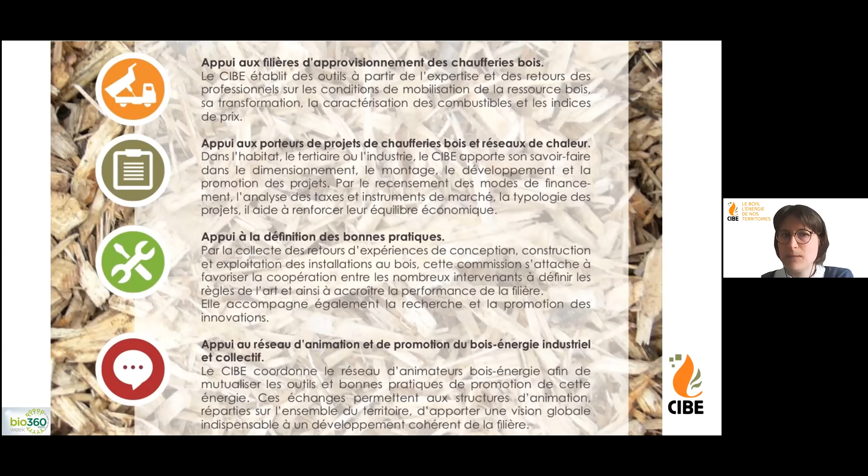So we have 4 working groups that we call commissions. Each of them work on the different aspects within our sector. The first one, for example, focuses on sourcing. The second one pays particular attention to providing support, legally speaking, to project managers and also legal and fiscal support. Then we have a third one that focuses on everything that revolves around technological improvements and maintenance on the different installations. And then we have a last one that is the one that we're going to home in on today. This concerns wood energy management, everything that concerns the local development of wood and energy.

So, 4 main parts to our presentation today. First of all, I'll give you a general overview about what we mean by wood energy management, our objectives, the structures that we're looking to set up, and I'll say a few words about what we call the Wood Energy Management Commission, and also I'll talk about the way in which our wood energy moderators or leaders or managers work. Then we'll move on and we'll focus on support to the structure when it comes to sourcing. Other people will give presentations at this moment.

We'll talk about the wood energy managers and the role they play in the local regions, all the actions that they take within the forestry and wood sector, also everything that we do to promote quality. And here we refer to the ISO 9001 certification and also the Wood Plus quality approach. And last but not least, we'll focus on all of the monitoring, the supervision that we do for the sourcing of wood energy in order to optimize everything that concerns it.

When it comes to wood energy management, what are we actually talking about? Wood energy management, well, it's all made up of organizations that, let's say, since the 1990s have looked to exit from the vicious circle of wood energy at the time. In other words, there were all these heating units, boilers and furnaces that were hesitating about turning towards renewable energy because they were scared that there wouldn't be enough local resources, and those who potentially could supply the resources didn't necessarily want to because they didn't really see whether it had a future or not. So why make any effort? Because maybe there wouldn't be any projects.

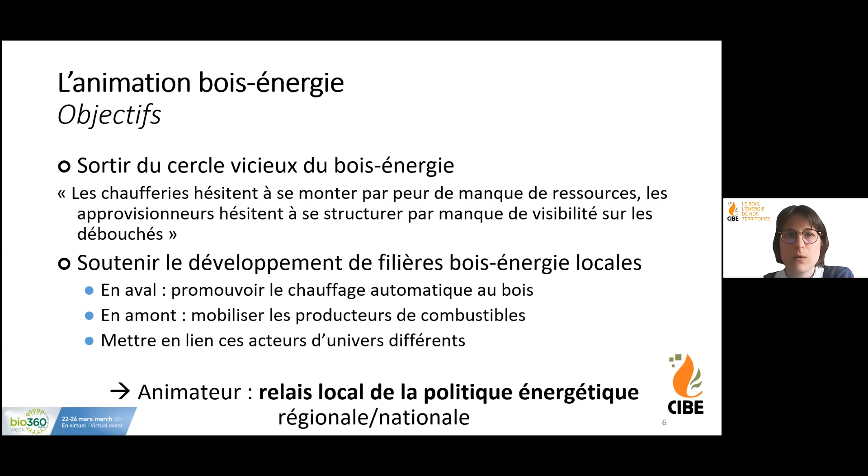So our wood energy management process wanted to promote automatic wood heating solutions to the industrialists, the farmers, and also the stakeholders in the market, and to encourage the wood producers and all of the different stakeholders to come together and talk to each other. So initially speaking, we served as a local relay to focus on national and local wood energy projects to gradually bring everybody together around the table.

So what looks very promising when it comes to wood energy management? Well, globally speaking, we tend to work with associations that bring together different professions between the wood and forestry sector. We work with associations in the renewable energy sector. It could be Energies 15 that we referred to earlier, and Bois Energie 66. We also work with lots of forestry communities, in other words, communities where they own forestry land, and also associations in a farming setup. CIVAM is a French organization that brings together several associations.

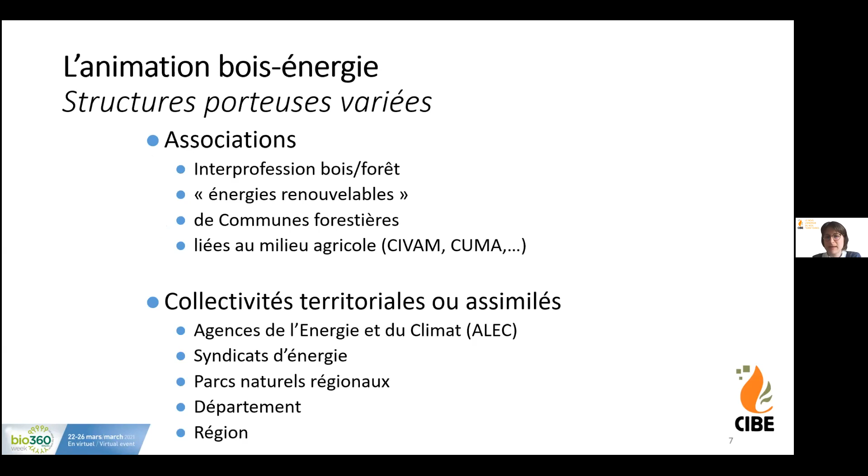These are all structures that are funded by regional delegations of the ADEME, the French Agency for Environment and Energy Management. And so it basically means that they play a very neutral role, and it doesn't cost them money in their local area because they're able to provide advice without there being any monetary interest for the builders or for the design and development office. I repeat, they are totally neutral. Wood energy can be a solution, but not necessarily always the best solution. So the idea is to always put together consistent projects in the local areas.

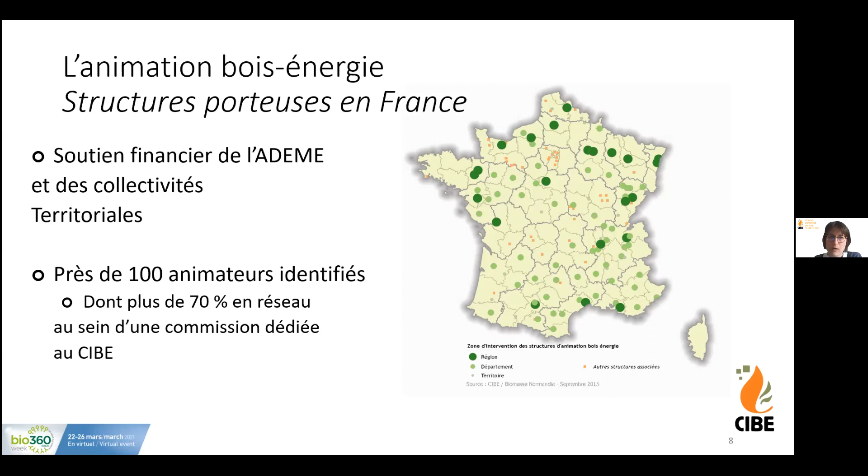In terms of our targets, we've identified 100 managers. We have nearly 100 wood energy managers, and over 70% of them are members of our association. So there is a certain amount of membership within our professional structure.

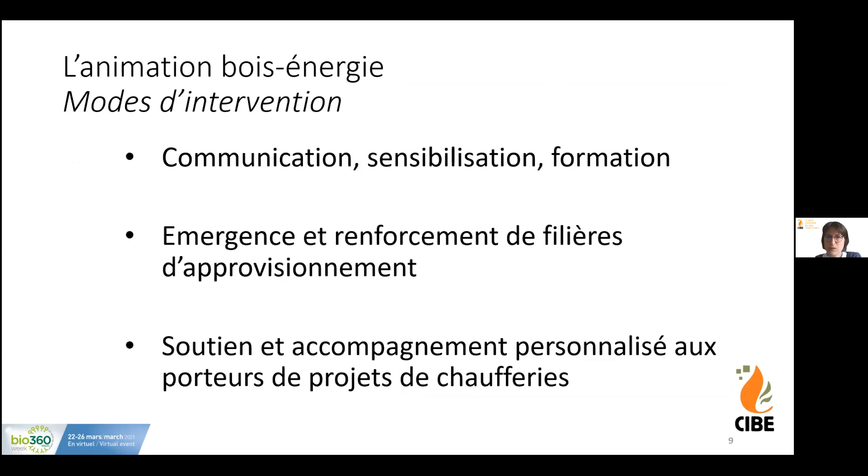When it comes to the methodology that they adopt, they have three different types of approaches. One, they communicate, enhance awareness, and provide training. Two, they attempt to reinforce the sourcing solutions and bring about new sourcing solutions. And they also provide personalized, tailored support for those who've got projects for setting up new heating systems in their local environment.

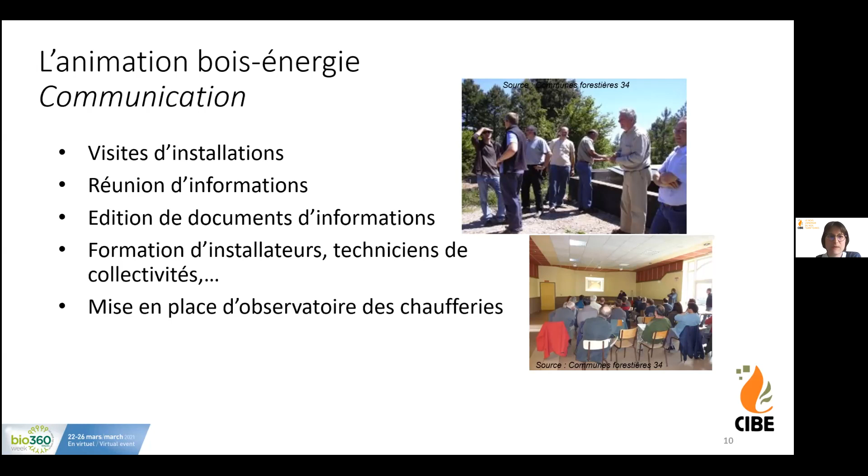Just to give you an idea as to how things go from a communication perspective, it's pretty basic, but it works very, very well. There are lots of site visits, information meetings, information documents that are produced on all of the different types of data. It can be the financial aid that can be provided, the different types of fuels, for example. Also training that is provided to the fitters and the local authority technicians, and the setting up of what we call boiler unit observatories, so that it's possible to clarify the different types of installation that exist in the local area and the different types of energy power levels.

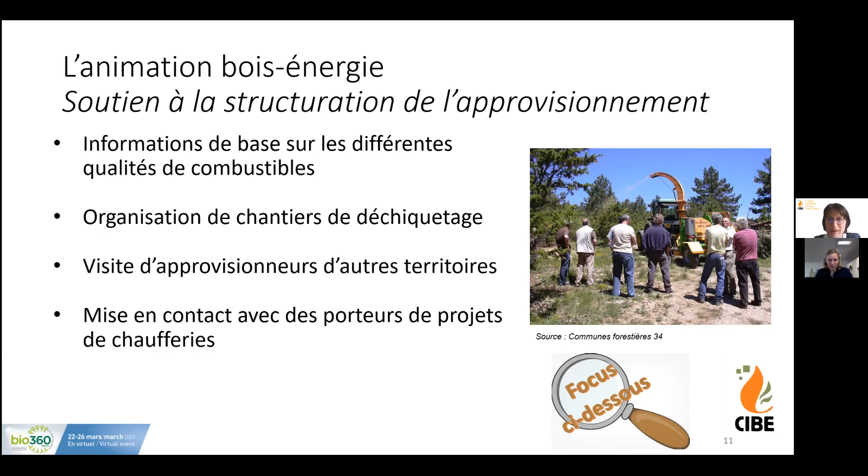And also what we do is enable those people who've got a project to set up a new heating system to be in contact with one another, and to be in contact with the people who can potentially source the raw material for them.

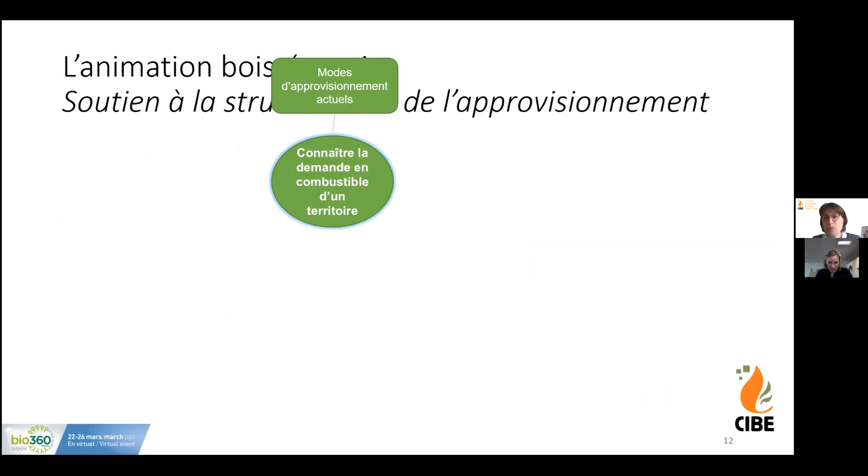By way of illustration, if we look at the support that we provide for the sourcing solution, what do we do? Well, a wood energy manager, first of all, has to fully understand the demand, the requirement, understand all the potential materials that can be sourced, understand the medium and long-term needs, understand the local area, and all of the different areas where the raw materials can be drawn from.

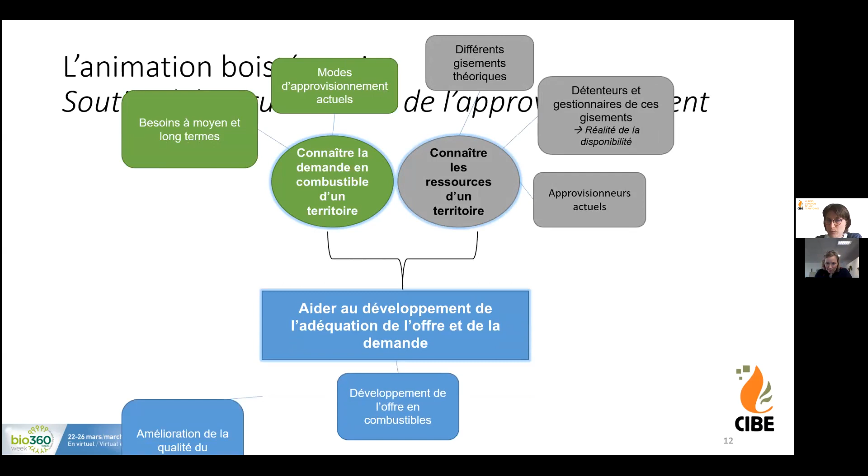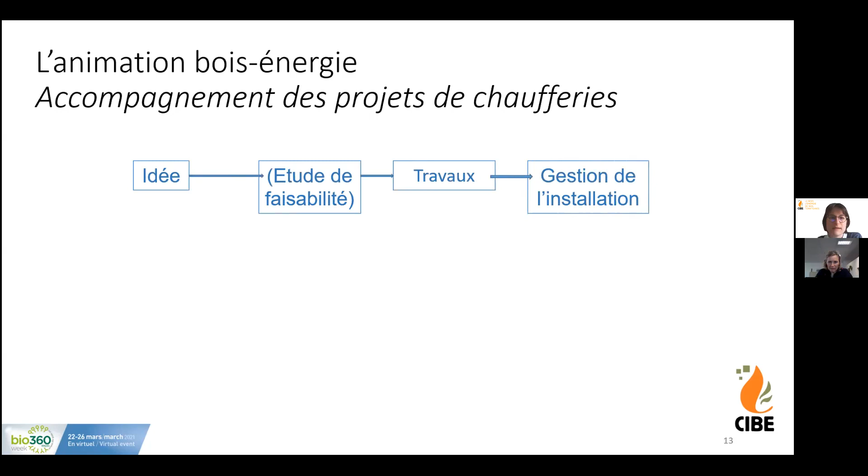Now, in order to provide support for the development of what is available and is out there and what the actual demand is made up of, you need to take into account the current raw material that is available, look at the quality, and then create a link between this raw material and further downstream the demand that is coming from the local authority or local organisation.

Just one piece of additional information before I pass the floor over to my colleagues. For the support that is provided for heating systems and the people who want to manage a project, the manager will play a role at the level of each of the different stages that you have on the screen.

You'll have the idea, then you'll have the feasibility study, and initially speaking, a certain amount of information will need to be provided on wood energy, seeing different heating units, understanding the raw material, and understanding the opportunity, and providing an initial study with figures as to the technique and the financing of a wood energy project, providing the specifications and providing information on all of the financial subsidies that can be provided. These are often questions that are very important for a person with a project.

Prior to the work, the wood energy manager can explain all the kinds of legal and financial setups that are possible, set up a sourcing solution, and of course, organize the request for funding. Then while the actual installation is being set in place, support can be provided in terms of follow-up. We have one of my colleagues, for example, who's here to answer questions on this if necessary. And what's important at this stage, of course, is to look at the potential sourcing and the improvements that can be made further down the line.

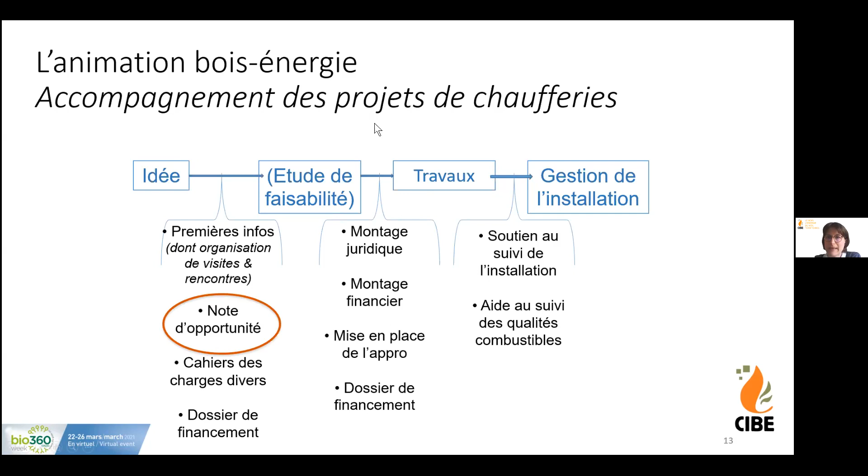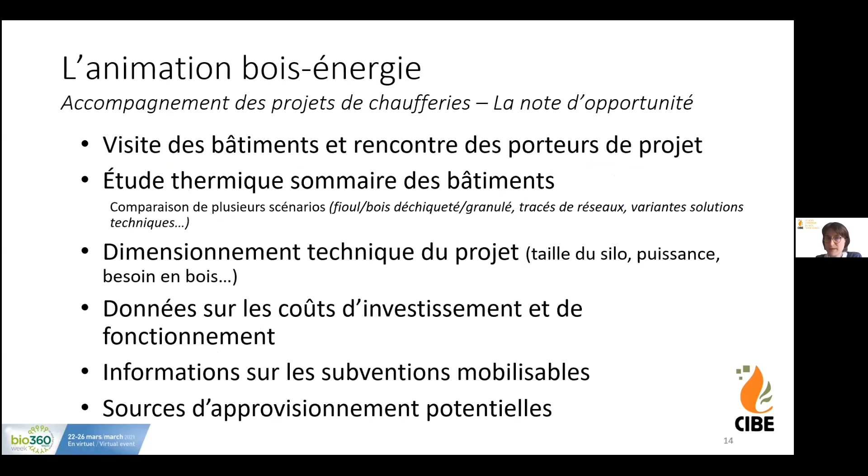A short focus now on what we call the opportunity memo. This is something that is important during the course of a project to simply ensure that we're on the right track. It's a form of KPI. What is important is to visit the buildings, to carry out a study as to the heating capacity of the building, and to fully understand the project, receive information on the investment costs, and all the other information related to the building. My last slide concerns wood energy management.

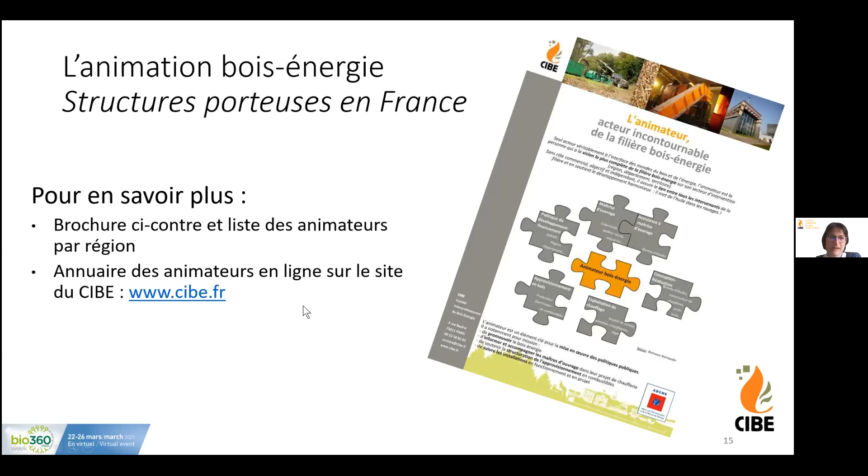If you would like to know more about where we are located and in your local area, if you're interested in meeting the wood energy managers, you can have this brochure and find the list of all of the managers on our website. So to help the managers, we've put together what we call a working group, which is the Wood Energy Management Commission. And as is the case today, our role is to promote the role of these wood energy managers, to share the tools and the best practices, and bring about a global vision so that the wood energy sector is able to develop at a local level.

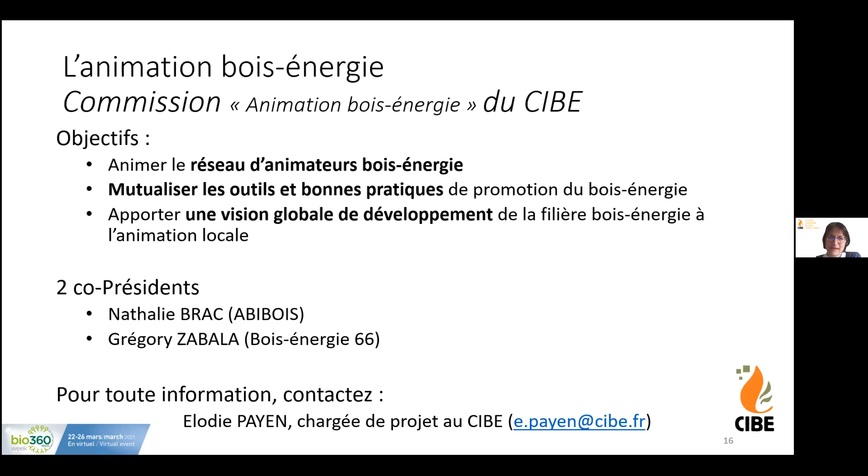We have two chairpersons there, Nathalie BRAC and Grégory ZABALA. They are present here with me today, and I've left you my details on the screen if you would like any further information. So without further ado, let me pass the floor over to Philippe BESSEAU, who will talk about the regional actions and the link to the wood energy sector. Thank you very much, Philippe.

I'd just like to check, are you able to hear me sufficiently? We can hear you. Okay, Elodie, I think you said virtually everything and we understood everything. It was all very, very clear.

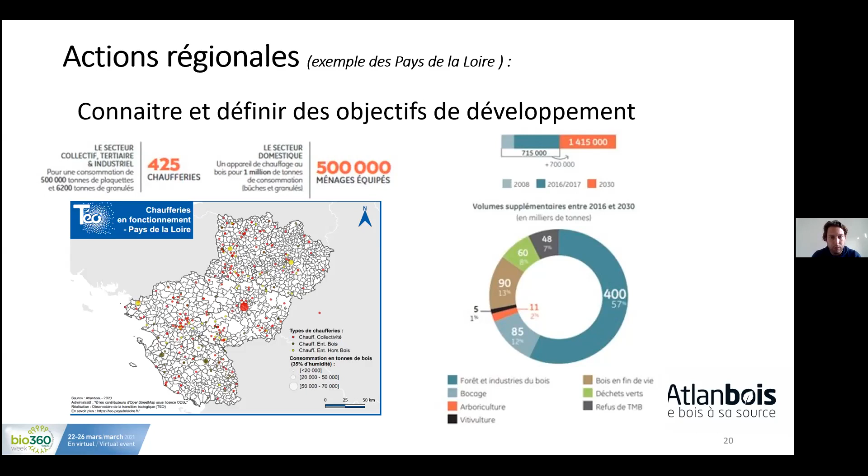Whatever happens, we've put together a certain number of actions so that we can better optimize and valorize the green chain, because in the Loire region, we've got a specific type of countryside, and we think rather than composting everything, well, there's a lot of wood in this potential composting material, let's use it. We haven't got lots of big heating systems that could use it, so we're better off doing the sorting beforehand. So we've put together many actions, we've invested the money to be able to do the sorting to better use this type of wood. Elodie.

So just to conclude, the aim is to work collectively together to deploy the leverage that we've got, to work with public authorities as well, so that we're able to create the right kind of leverage.

We want to help for renewing for the future and develop the amount of wood for logging that is made available, but also the wood in the forest, the wood, for example, as well from hedging that we can potentially use. We basically want to optimize on the investments as well to create the right production sites if necessary.

Next, of course, our role is to also consolidate what exists. That's very important. If we want to develop this wood energy sector, we've got to make sure that it's healthy across the board. And we've got to make sure that we're working with people who are flying the flag, who are conveying the message that we're not the only people, that it gradually trickles down. And we want to gradually make it possible to develop projects.

So basically, at the end of the day, we know pretty much all of the streets where heating networks are possible. So next, in the field with the different people who've got the know-how, how can we develop these projects legally, financially and so on. And the same is true for companies. We simply need to make sure that everything is in place so that we can develop these projects. So that's our role in line with resources and with producers. So that's it. As far as I'm concerned, I think I finished.

Okay, move on to the next slide, please. So why ISO 9001 certification? The sound has been cut again. Yeah, yes, there was a mini cut, yes. So I can see it, it tells me on the screen. Sorry, let me start again.

So why ISO 9001? The objective was to go further than simple product certification. There are many for wood energy, the EN+, DIN+, NF. There are also different charters that have emerged over the years. So ISO 9001 is the nec plus ultra. You can't go higher than that. Above all, it gives you recognition. It's ISO recognition, so international. So CBQ Plus is a supplier of energy, of wood energy. Wood energy that is top quality.

And there are many requirements that have to be met, and regulatory requirements. And some are not very well known. Companies are often not very big, so they don't have much time to look at what's happening from the point of view of regulations. So they have to provide a product and services that are compliant with the customer's needs. The customer is king, as we say in France, but there are some specific requirements when it comes to silos, supplies, and certified suppliers have to follow these regulations.

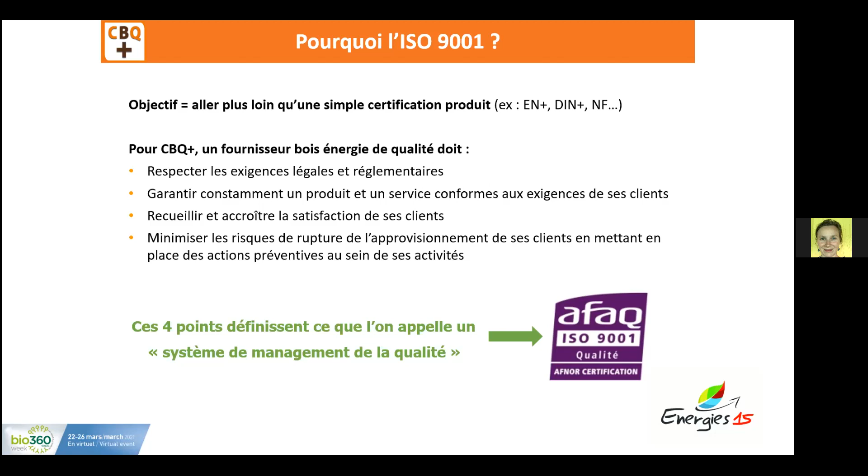So these 4 points define the quality management system. This is the basis of ISO 9001. So what does CBQ Plus represent? In 2020, it represented 1.2 million tons of shredded wood, over 2,000 shredded wood heating plants, representing 80,000 tons of pellets and 25,000 pellet heating plants delivered.

So we're present in 10 regions. So we're talking about 75 certified companies, 53 of whom are also PEFC certified. We're talking about 155 dedicated platforms, 500 dedicated machines, and 550 qualified people.

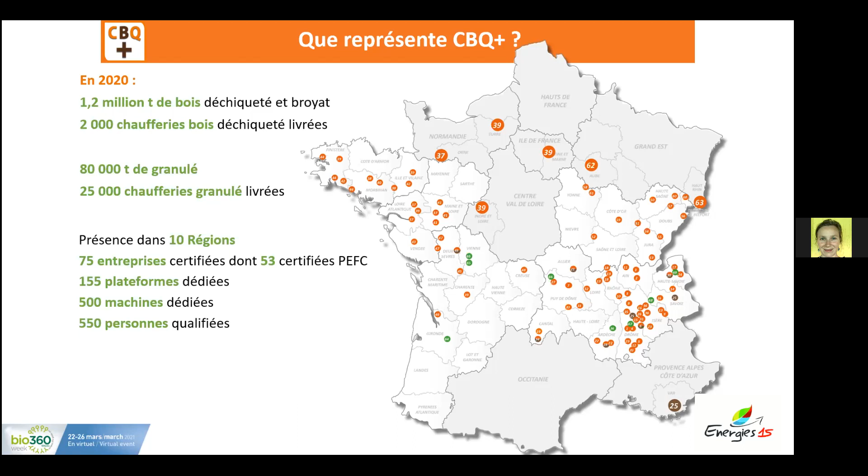So you can see this on the map. There are regions in white that are covered by different structures. There are regions that are currently just starting out where we carry out events or different missions when there is a need from the point of view of the supplier. And as there is support from ADEME, the idea is to cover the whole of the country for people who are interested. So 75 certified companies, 155 dedicated platforms, over 1 billion euros invested over the past 5 years.

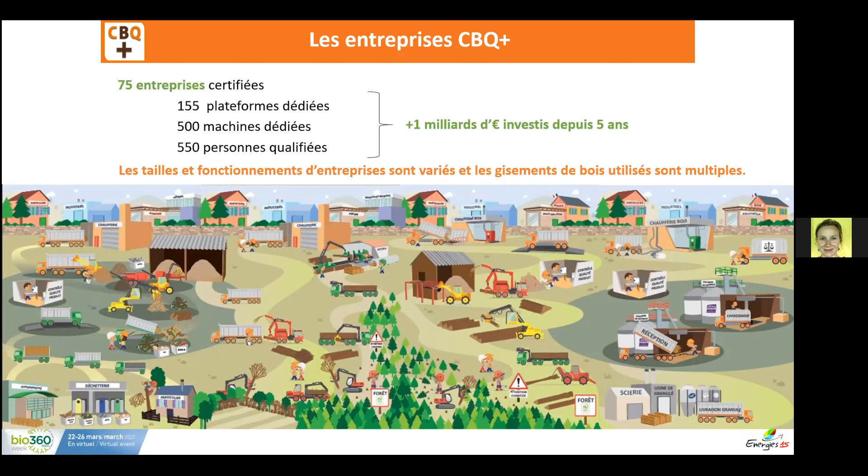So here's a very complex diagram that shows just how complicated the supply of wood energy is, with differences according to specific processes, so that each person can have the right fuel. So in CBQ Plus, the sizes, the companies are different, the reservoirs are different, composting, different pellets, forest wood. So we're talking about small companies with just one person, to companies with multiple platforms and many more members of staff.

So what does CBQ Plus guarantee for its customers? Well, they take into account all wood fuel, so shredded wood. Following of associated regulations: it's a system that is adapted to small community heating plants, but also big industrial heating plants or cogeneration. All sources of pellets are covered by the certification.

It's about securing supply with visibility of stock, maintenance of equipment, proper training for personnel. Even for small companies with no employees, it's important to be able to manage stock so they are never out of stock. It's all about following subcontractors with partners who are assessed on a yearly basis. This is especially important for very small companies that subcontract an awful lot. They need to have reliability too. So CBQ Plus makes sure that companies cover all of these points.

It ensures traceability and quality control. Traceability, we're talking about products right along the production system, regular in-house quality checks, humidity measurements in standardized ovens, for example, external quality checks carried out by an independent laboratory. So twice a year, all of the company's fuels are analyzed in the laboratory.

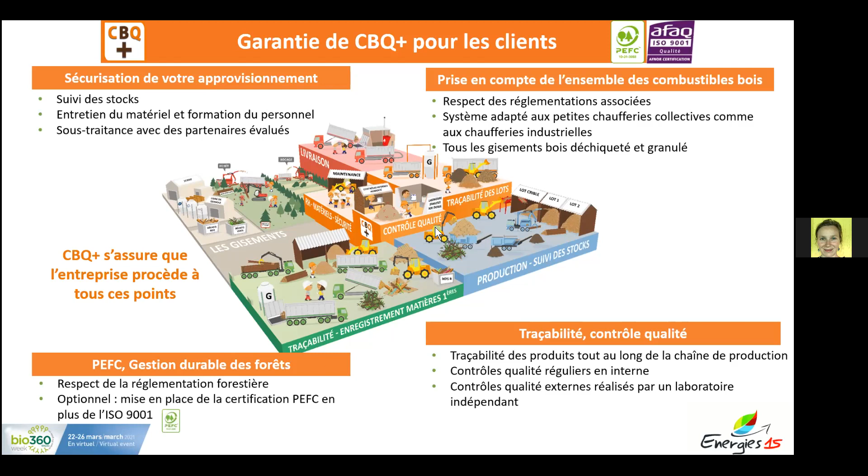So for PEFC, we've got sustainable management of forests with compliance with forest regulations. And optionally, you can also have PEFC certification on top of ISO 9001 certification. So it provides support, local support for companies. CBQ Plus works with those involved in wood energy.

In my organization, there are two people. Abibois is the same thing. Pro ETF, no. They're not a structure like, sorry, no, I'm getting that wrong. They are a structure, but they don't do any pre-feasibility studies.

So Elodie gave you the map of France with the different wood energy stakeholders. Some of these are also CBQ Plus stakeholders. So it's about working with local trained people. CRER, Pro ETF, there are different stakeholders in France. Each one is checked by CBQ Plus. So we carry out in-house audits, in-house controls. And then there's a check carried out that all of the processes and procedures are being followed properly. There are external assessments carried out by an external certifier.

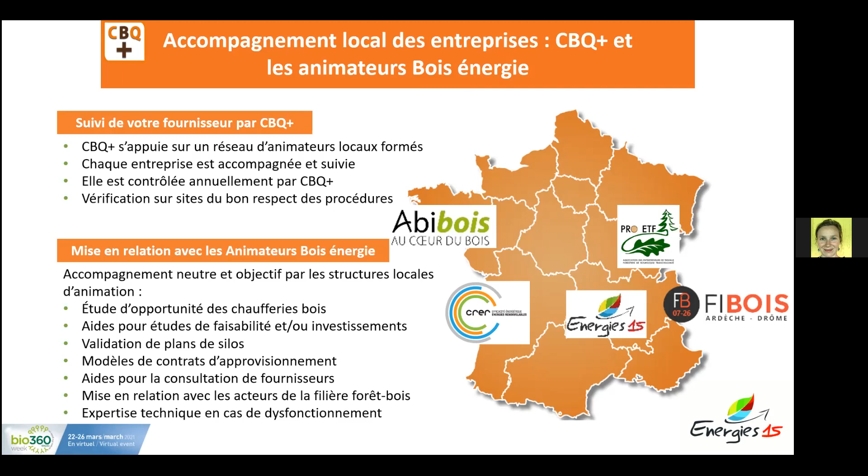So we also work with people running the sector. As Elodie said, the support is neutral, objective. Opportunity studies for heating plants are carried out, feasibility studies, investment studies, validation of silo plans, contract models. There's help with the consultation of suppliers. Different stakeholders from the forestry industry are brought together. There is help with disputes when there are problems, and we can then certify suppliers of wood fuels. There we are. Thank you.

Thank you, Annick. So I'm now going to hand over to Grégory ZABALA from Bois Energie 66. We're going to look at how to optimize supplies. Yes, hello, my name is Grégory ZABALA. I work for Bois Energie 66, which is an association. It's a mission that has been carried out every year since 2018. The association was created in 1996. And what I can add to what has already been said is that these structures, well, we were suppliers of wood energy to begin with.

So there's been an increase in heating plants, and suppliers were not there to feed into these installations. So between 1996 and 2017, we were suppliers. So it's a field that we know very well. And we continue to help those who supply wood energy. We're on the other side of the fence, though.

So we've set up a tool, a monitoring tool. The objective is to follow installations and to help users to follow and monitor what's happening from one year to the next. So there are different objectives behind the specifications. One for us is to know what the consumption is on an annual basis. The idea, just to give you an example, between 2010 and 2011, the objective is to see what the consumption for a specific county was and the associated power.

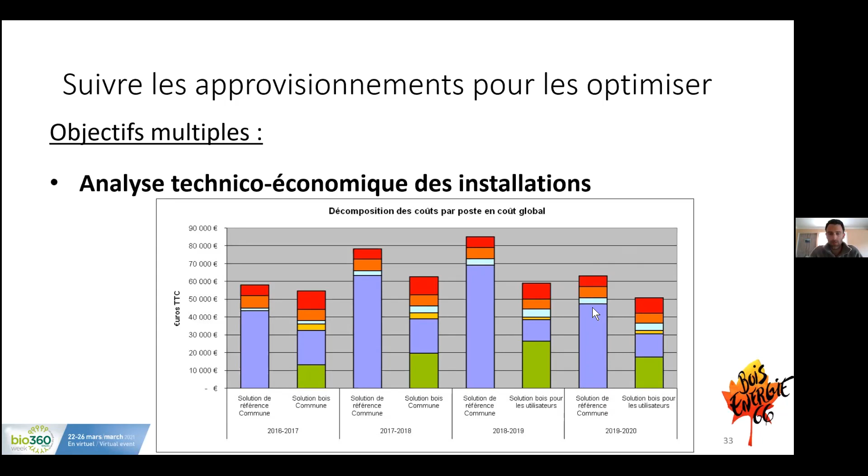And a last point, there are other points, but when it comes to monitoring, it's very important to carry out a technical and economic analysis of these installations. So here we've got the same graph illustrated from a financial point of view. So we provide all of the financial information and we can calculate savings made over the heating season. And you can see the impact of wood prices. It represents over half of the cost of fuel with respect to the reference solution. So, what would have happened if there was no wood? And then you've got the fossil fuel share that represents 60, 70% over the course of a year. So this means that we can see how many savings were made over how much time and when the heating plant has become profitable.

So as a running structure, we're there to help heating plants, help them to get trained in order to provide fuel quality. They need to know how to recognize a quality fuel, a fuel that is in line with the installation that they're running. So we help them with humidity, grain size distribution. We help them to roll out quality-based approaches. We're also there to help them with the rollout itself. And we're also there to encourage them to set up supply contracts to guarantee that they have the right kind of fuel for their heating plant, and so that they know how to manage problems with their suppliers.

So the idea is to anticipate problems. So if there are new installations and new suppliers, then they need to be able to work with them to plan ahead for new stocks. But when we look at the situation, we can also observe, for example, that there might have been some pressure or tension at the end of the year, a supplier with no more dry fuel. Then it's important to understand why, whether there were specific needs or additional needs. So we can decide whether it's important to increase their supplies or not.

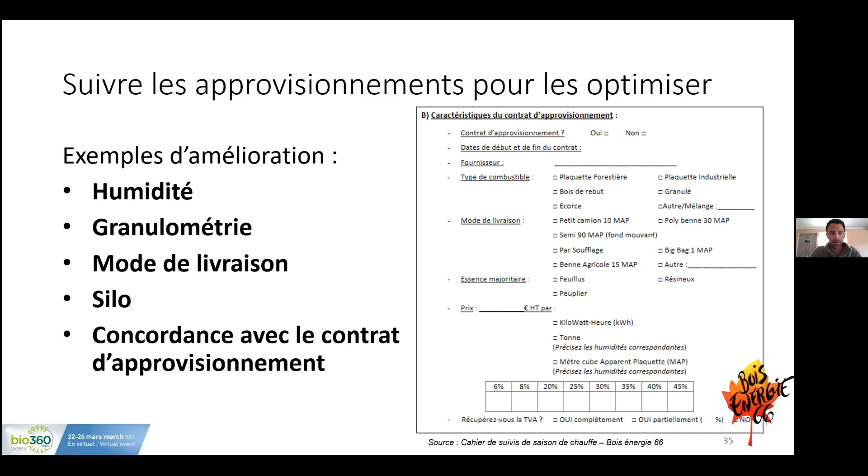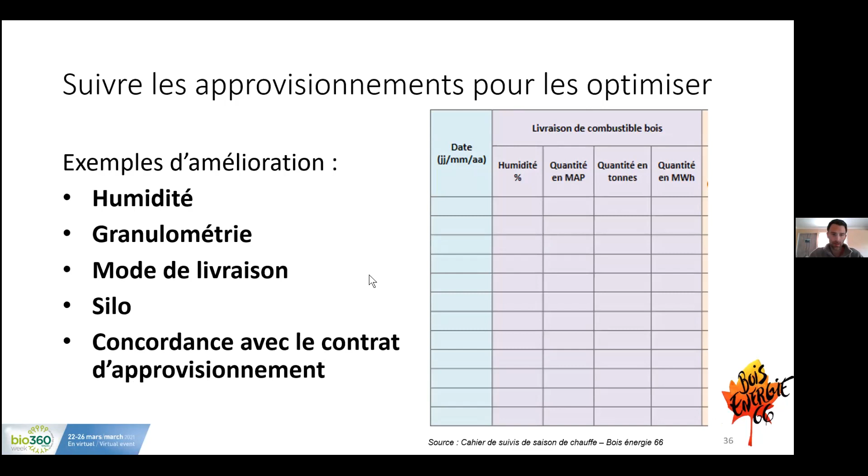We can adapt humidity and grain size distribution. We know that such heating plant will need such type of humidity. We know whether it needs to be drier or more damp. We know that it's better to have 30% humidity for certain systems and grain size, sometimes bigger, sometimes smaller. This is all based on experience. And the last point, we need to set up a supply contract. We can help them to set up a supply contract and make sure that the supplier actually follows what is set out in the contract. So this is the kind of thing that we do.

So thank you very much, Grégory. So I'll now take over for the conclusion. Thank you to the three of you for your illustrations. You've really told us what it involves.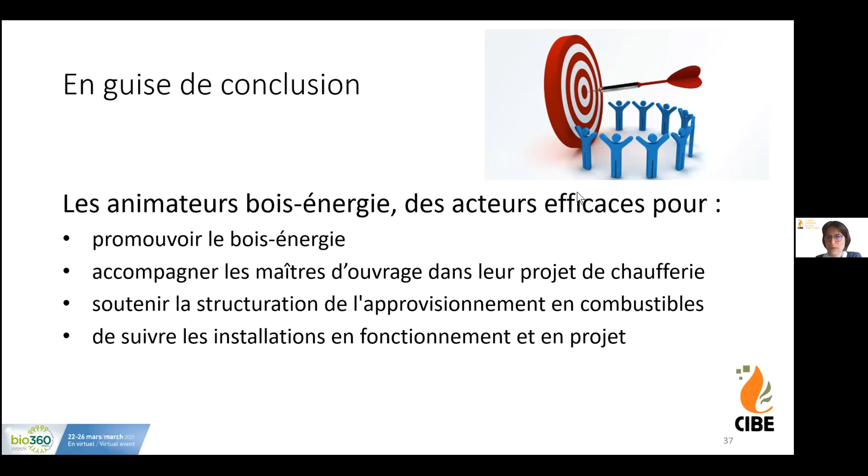So I just wanted to go back to the assets of wood energy promoters. What do they do? Well, they promote wood energy. They make sure that projects are consistent. They provide support to project owners with their heating plant projects. They provide help with the structuring of fuel supplies. They make sure that the supplies are in line with the existing and future heating plants. They also monitor installations when they are operating, but also when they're just at the project stage.

And they create a link. So that's maybe the first asset that they have, their most important mission. They provide the link between local stakeholders in the sector and professionals. They provide information about expertise, local expertise. So get to know them and tell others about them. There's a link to the internet site where you will find out more, and there's a directory that is provided on a regional basis.

I'm just looking at the chat to see whether there are any specific questions with respect to the presentations. And unless I'm making a mistake, there was just one question from Natalie. How do you manage the destruction of orchards, especially when galvanized iron wires inside them prevent the wood from being used? So Philippe BESSEAU answered this. Wires are not problems for orchards. We use pallets. There are shredders that break up the material. Sometimes it's better to do this than burn things locally.